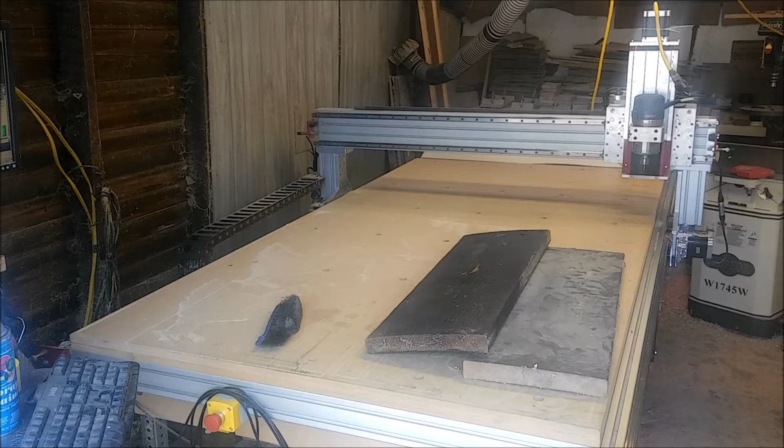Today we're going to go over a little project on how to make something for a Halloween gift that you can keep for yourself, make for a family member, or start selling. We're going to use these two old boards here that have been around for a while. I'm not sure what they were used for, but they're bowed and cupped, so we need to plane them down first before moving on to the next steps.

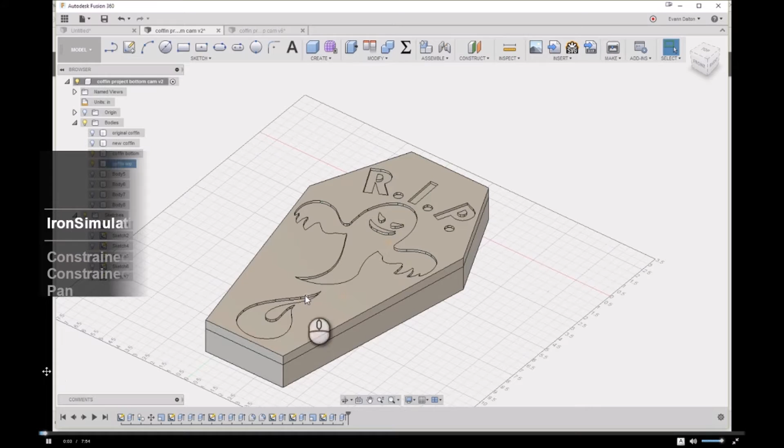We're going to do this project in Fusion 360, and it's a basic project—just a little coffin candy dish or something. I thought it was a cool idea for the upcoming Halloween.

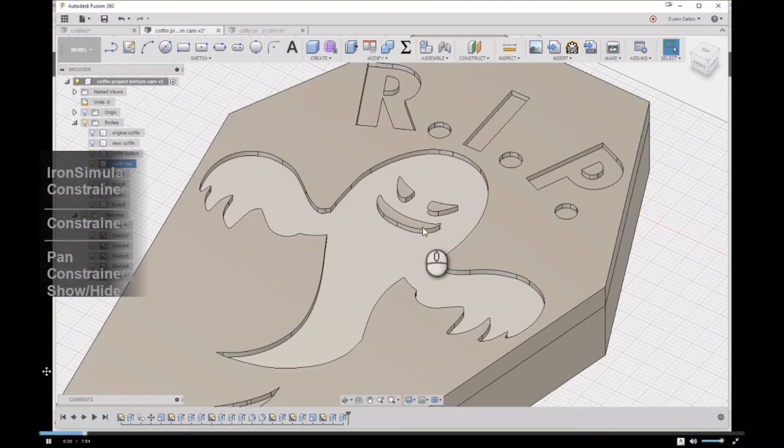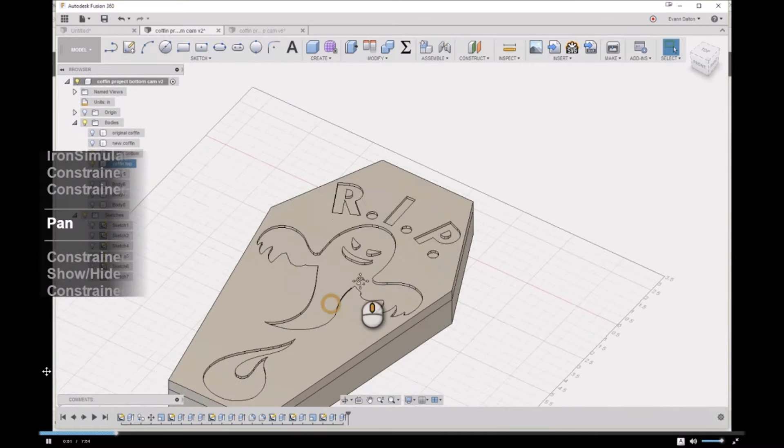The real reason I wanted to make this video was to show these pocket engravings. I'm going to use a technique with solder, putting it inside the pocket, then sanding everything smooth so it looks like a solder inlay. I've never done this before, but it looks pretty neat and actually looks like there's real metal in there—well, I guess it is, since it's solder. That's basically what we're going to do, and why I created this project.

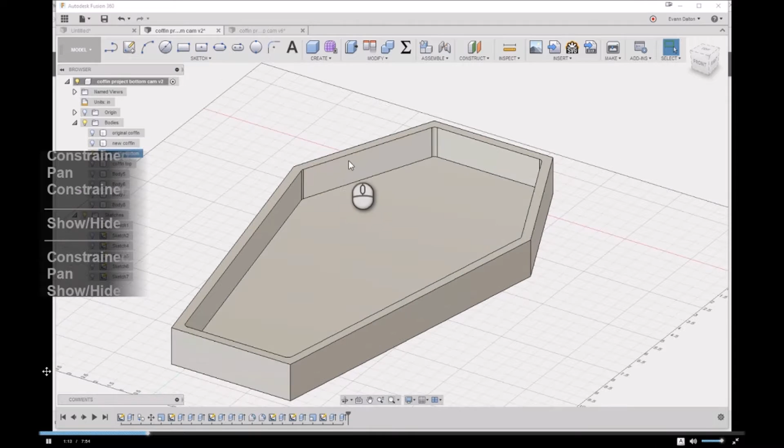I probably went a little over the top with the different designs on here, but oh well, we'll see how it turns out. Here's the top, and here's the bottom with about a 1 inch deep pocket—that's a lot of material removal, and it'll probably take a while to machine that pocket.

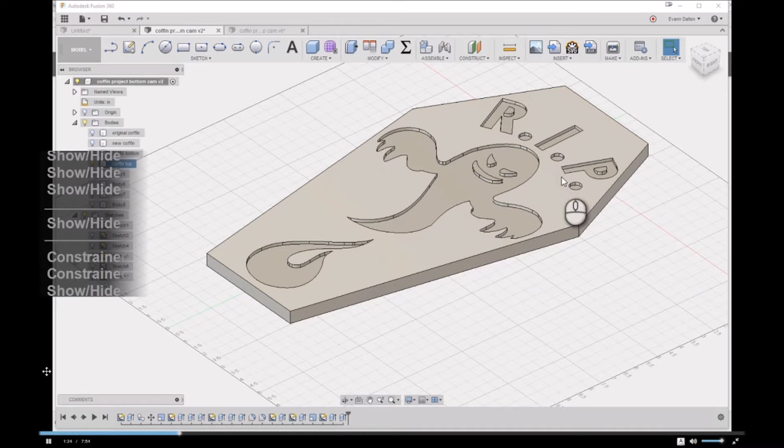Another thing here is we're going to do some double-sided machining, because on the top we have this piece and then this little lip that we need to get rid of. So we'll set up double-sided machining for that too.

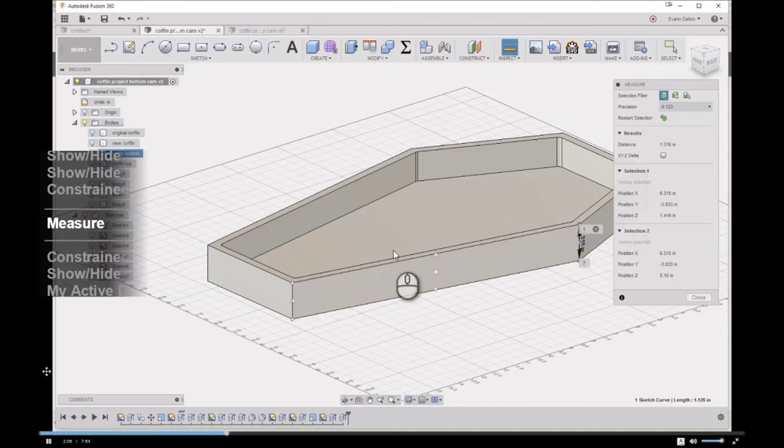Also, this piece right here is about 1.316 inches—a little over an inch and a quarter—and I really don't want to neck down one of my tools. So we're going to double-side machine this as well.

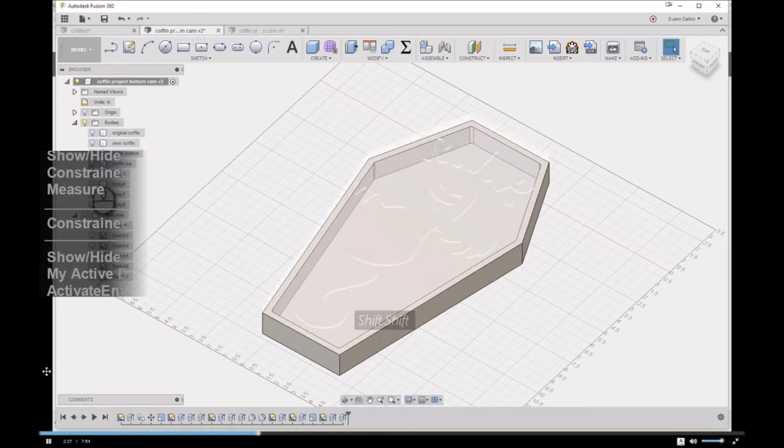We'll cut halfway through on the top side after the pocket, then flip it over and cut out the rest on the bottom side. That'll work, give us some practice, and let me show you the double-sided machining method I want to use.

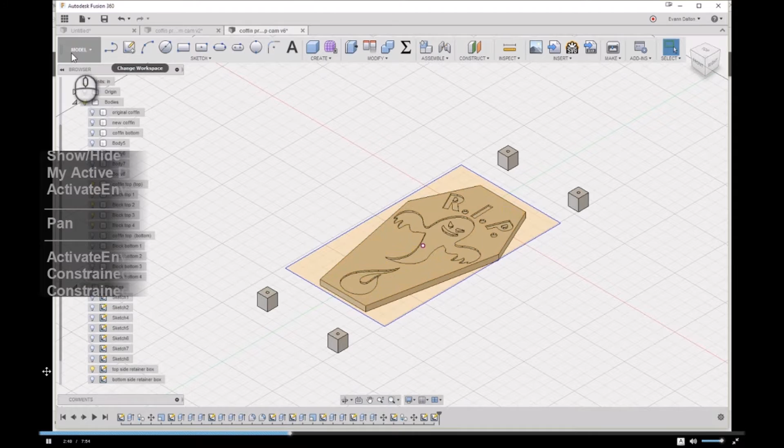For the top side, here's how I'm setting up the CAM. In the model, for the top of the top side, I set up these little blocks that are pre-measured for my stock. When we go into CAM and click on the setup, you can see I've specified my stock, and these are well within range. What these blocks do is hold the pins.

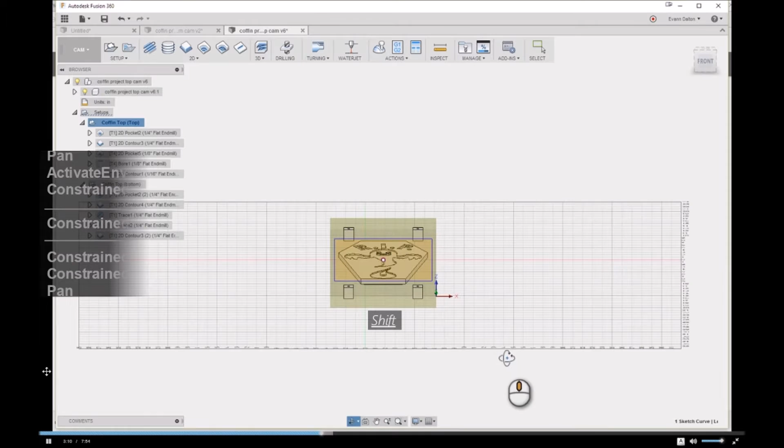Little wooden dowels go in here, and then when we flip it over, we'll start out here as you're looking at it from the front, then flip it and machine the bottom side. So that's basically how we're going to do it.

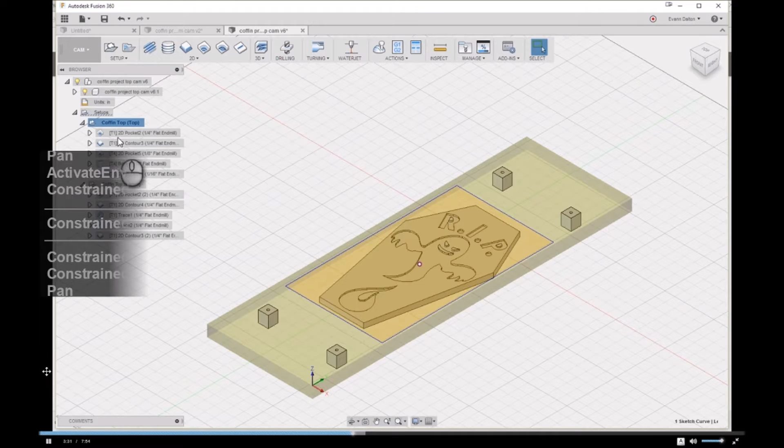Here I just did a simple 2D pocket to surface it down a little bit, and it'll work pretty good. First we'll do that pocket, then come in and—since we're not changing tools all the time—we'll cut halfway through and machine down, then do that contour.

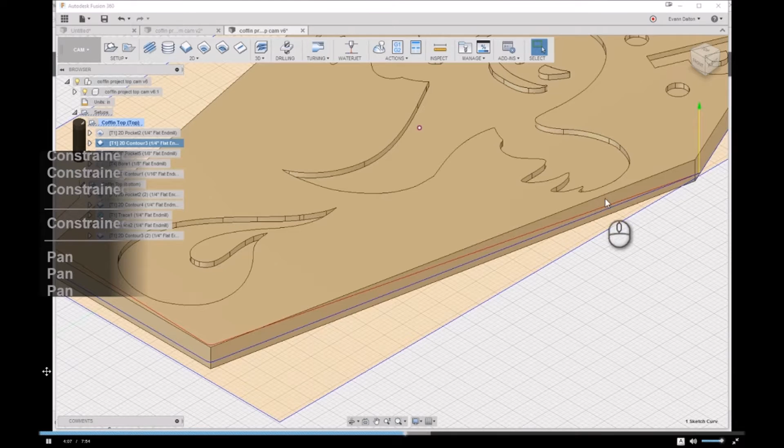But mind you, it'll still be held in because we'll have all this material underneath of it, so it won't be a problem. And then we'll go back and do the pocket engravings, and bore holes for our pins that we can put in.

Once you finish this top side, before you run the bottom side program, you can go ahead and just post-process out this single bore operation, and bore those exact holes in your table.

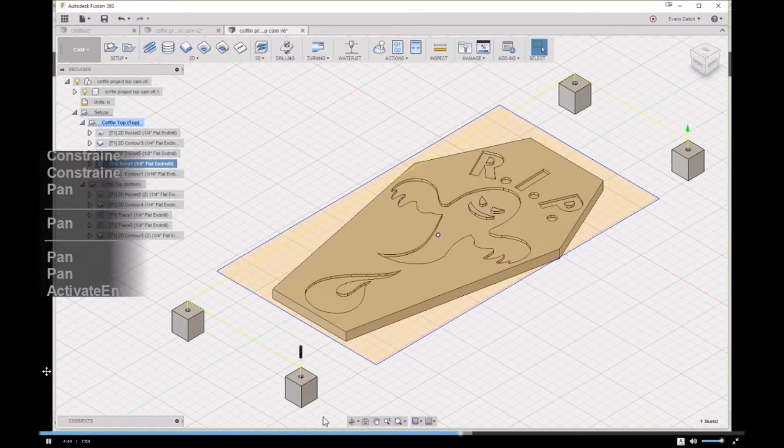Of course you'll have to re-zero off of the corner of your stock once you flip it, but you can drill these holes anywhere you want and they'll line up every single time because they're in line on all four sides. So after we finish that, on the bottom side machining, same thing.

I set up with the blocks. We don't need to drill any holes for the dowels because we already have the dowels in on the underside.

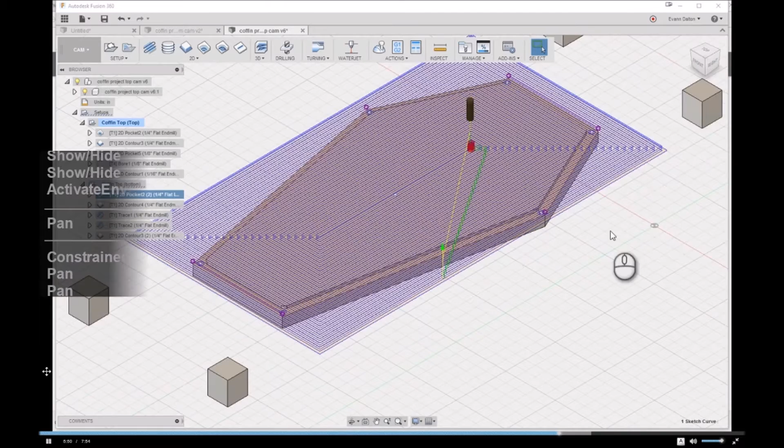I got to surface it off a little bit more again and come back in here, and we'll just cut this little dado or groove out, and then that's pretty much it. Bottom, we're just going to come in here and do basically what we did on the other one.

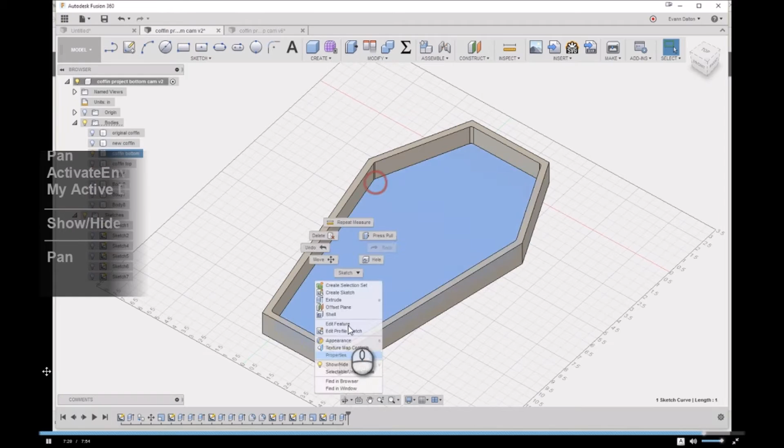We're going to come in here and take all this material out in the center here, and then we'll machine halfway down on the cutout, then we'll flip it, and machine halfway down on the other end.

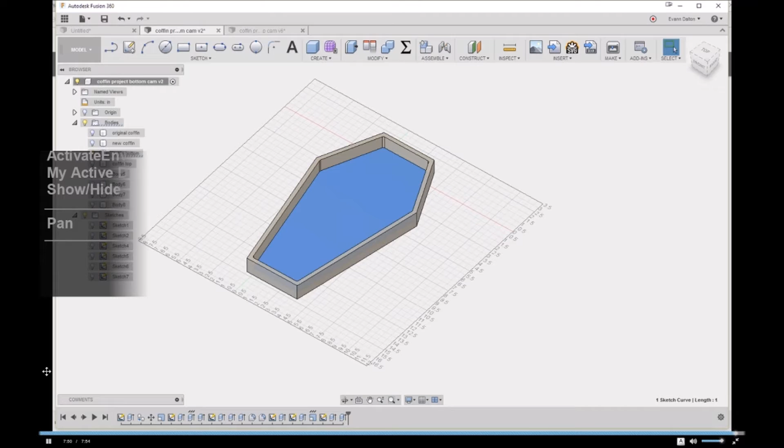I don't want to put my clamps on the top side here. I want to have them a little bit lower so I can use shorter screws. So what we're going to do at the end of this material here, because we have some room, our dowels aren't until back here and we got some room.

So I want to be able to cut a dado or a pocket into the end grain of this piece of material so I can stick my clamp into it, and that's how I'm going to hold it down.

So I'm just going to use a drill and then a little trim router to make that happen. I just need to drill one hole in the end grain and then go back over it with the trim router to create my little pocket.

Alright, so we just finished cutting the top side of our little coffin project, and it turned out pretty good. Once it drilled the holes for the dowels, I drove the dowels in. They go in a half inch deep, and then now we need to cut our holes in our spoil board so it lines up.

All I do is keep the same zero in Mach 3, and then I'll re-zero the tool on the spoil board, cut my holes, put my board on there, and then re-zero the tool back on top of the stock.

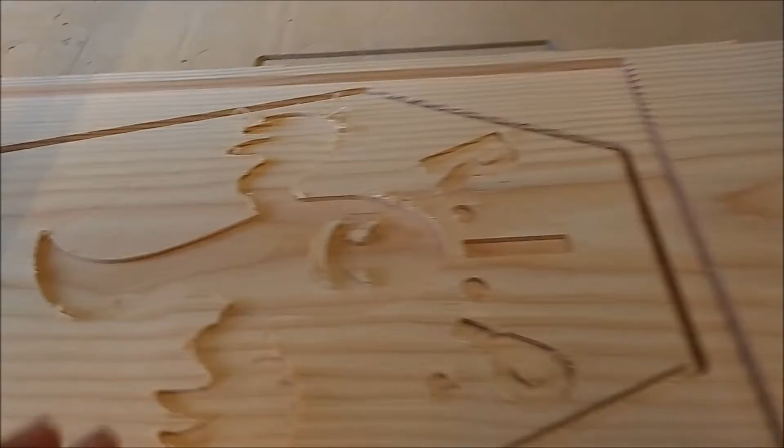And you can see over here the cut came out pretty good. I was using an upcut spiral, not preferred. I'd like to use a down cut, but it came out alright.

So now we'll go ahead and cut the underside of that, and the top side will be more or less done of the machine work.

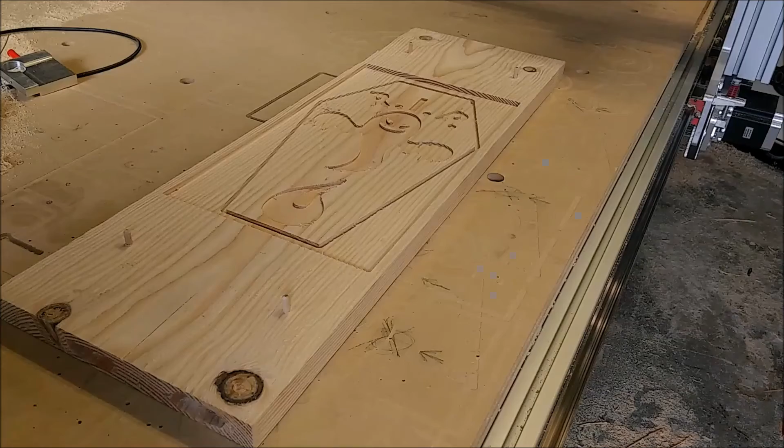Okay, so now we drilled our holes in our spoil board, as you can see here and here, and there's two more on the other side over there.

So what we'll do is take the stock, and just like in the program, we'll flip it over just like that, and line it up with those dowels and put it in there. If you did everything right, it should line up perfect as you flip it.

Okay, you can use light pressure to push it down, and we'll use a hammer to put it down the rest of the way and make sure it's nice and flat.

Now we're nice and flat on the spoil board, and we can go ahead and cut the bottom of the top side.